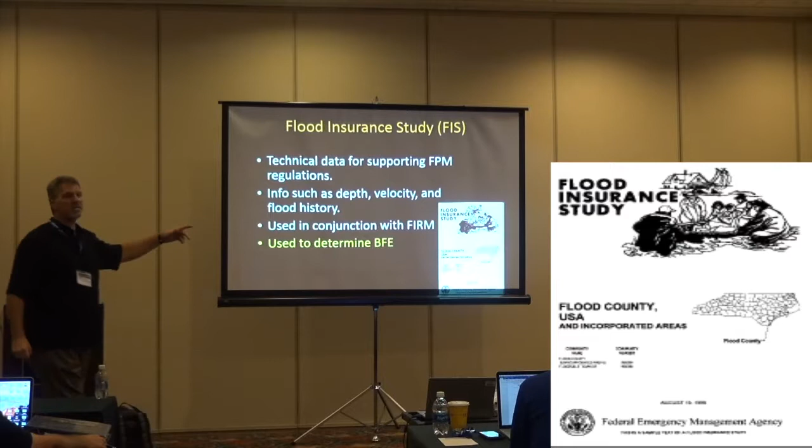No single document, no single paperwork is to stand alone. It's like you never say, hey, I got all my information from this, or I got all my information from this. We use those in conjunction. And we use that to determine the BFE. Included in our flood insurance study is the range of Manning's n values used for the channel and overbank areas.

Don't worry, we're not going to make engineers out of you, unless, is anybody already an engineer? Anybody a PE? Oh, well, there you go. So we don't have to make, you can try to make engineers out of me. I am not an engineer.

But it goes to the aspect of Manning's n where we're talking about the resistance. Now, rest assured, you're not going to have to calculate any resistance. You're not gonna have to calculate any of that in the channel flow. What you do need to know is recognize how that value is used for determining aspects such as the velocity.

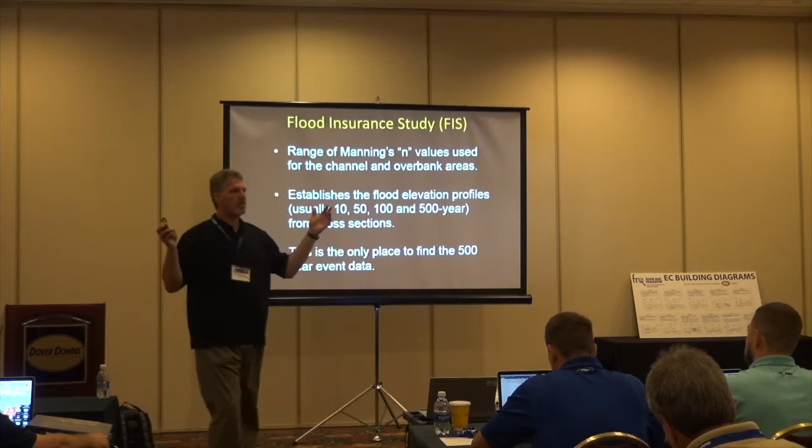Yeah, Manning's n basically defines the resistance in a channel, whether it's concrete, tall grass, rocky bottom, mud, and we'll see a graphic of it. As I said, you don't need to worry about calculating, you don't need to know what the actual numbers mean, just know that that's what results in how we determine how fast the water is going to move through a channel.

A flood insurance study establishes the flood elevation profiles, usually 10, 50, 100, 500 year. And this is the only place to find the 500-year event data. You know, we talked about those shaded, unshaded areas on the FIRM. Well, the only place to find the real data for those 500-year areas is in the FIS. Anybody need a little bit more time for this slide?

Manning's n is the resistance in the channel. That's the engineering calculation that is used, and the resistance being by what's on the stream bottom. Whether it's tall grass, short grass, concrete, rocks, mud, gravel, you name it. Every item has a resistance value to it; it all impedes the water flow. Some of it impedes the water flow greater than others. If I have tall grass, it's going to slow down the water more than smooth concrete will.

A very important term we need to understand is the floodway. The regulatory floodway is the channel of a river or other watercourse and the adjacent land areas that must be reserved in order to discharge the base flood without increasing the water surface elevation more than a designated height. Right now you're saying, wow, that's a lot to remember, it's kind of confusing. Guess what, I'm going to show you a graphic that makes it a lot easier.

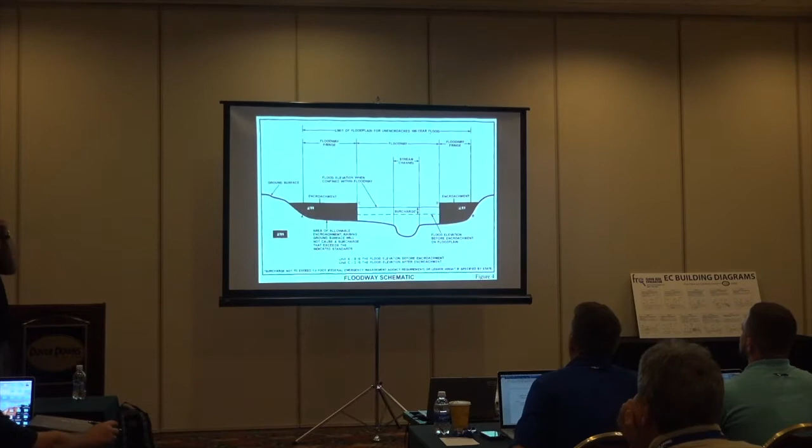So here's the graphic. I'm a picture person. I like seeing graphics and things. This is the easy way to understand it. So this is my floodway. Now visualize, this is my river or stream flowing in this direction. It's a cross section. It's a profile, cross view.

Here's my stream channel, here's my water level, here's the one bank, here's the other bank. So my floodway is the area where my water always is, essentially, and that's defined by here. So here's the area where my water always is, and that's my floodway. The areas on either side of the floodway we call the flood fringe, or the floodway fringe. They're the fringes on either side of that main channel.

Now, what do you notice about these two fringes? They have different heights, and they're also not symmetrical. They do not need to be symmetrical. A lot of people always confuse it. They're like, but they're not even on the same side. They won't be.

Does anybody go canoeing? If you've ever gone canoeing down meandering rivers, you have the slip-off slope and the cut-off slope and some of these huge built-up sandbars and some of the deep part. Almost every river is like that. Most rivers are not symmetrical, so don't let it confuse you when you see an uneven area. It still counts the fringe and the floodway and the fringe on each side. Altogether, that is my 100-year floodplain.

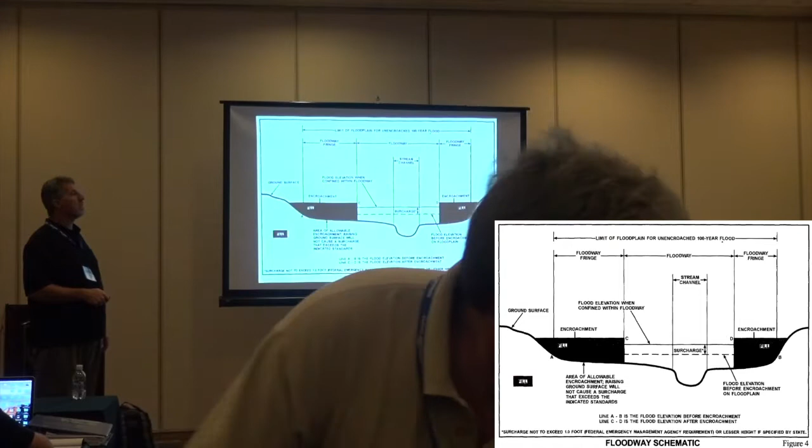Well, and they have to define that. And that brings up a good point, one of the things to remember about this is it's not limited by scale. So this here, say it's the Mississippi River, that could be a mile wide, then each one of these fringes could be another mile or two wide. Don't always depict that small little river running behind grandma's house. This fringe, this floodplain, could be miles across.

So here's our fringe, here's our floodway, here's our fringe. Now, can I build something in the floodway? Am I allowed to build in the floodway? True or false? How many say true? How many say false? Those of you that said false, you should have said true. You can indeed build in the floodway. There's nothing from the NFIP that says you can't. But guess what? We really discourage it. We don't want people building in the floodway. They can, but we really try to discourage that.

If they do want to construct something in the floodway, what do we require of them to submit? You ever heard the term no rise? Now there's no specific certificate. FEMA does not have a no rise certificate. The no rise is an engineering study performed by an engineer that determines anything that's built in this area is not going to cause the water to rise. So they named it a no rise. What a novel concept.

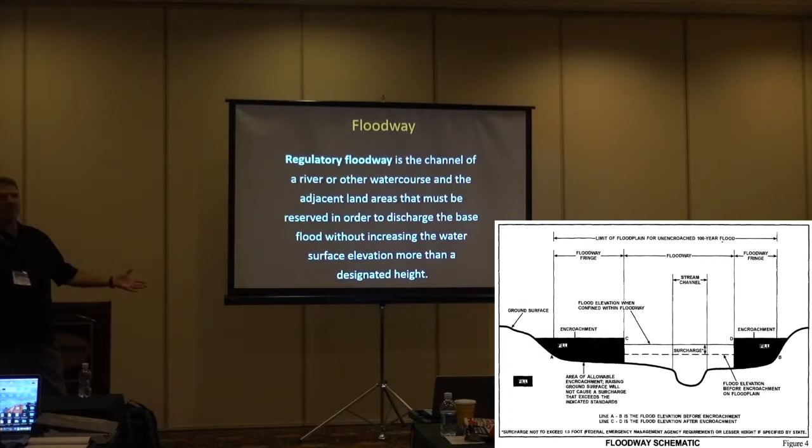What by the NFIP is the maximum rise of surcharge allowed? 1 foot. And we're going to turn all this back into a map reading skill pretty soon when we see the floodway on a map. The important thing to remember is we've taken this definition, kind of arduous, kind of cumbersome, and turned it into this picture. A little bit easier to remember.

Okay, so I can also build in the encroachment area as long as I'm not increasing the floodway more than 1 foot, or per county regulation, whatever. Correct. Be clear on that though, the 1 foot is a FEMA regulation. All right, but if I build in the floodway, say I want to go beyond the encroachment, build in that floodway, I can't have any rise. Correct.

No rise if I build in that. It has to be federally. But you're still, let's see right here, the surcharge is not to exceed 1 foot or lesser. So I can say it's 6 inches if I want to in my state. That's why you supply the no rise. If you build something there, the water's going to rise. It has to. The water, you're displacing something.

Right, so why the no rise? Why not say rise no more than 1 foot? Well, rise doesn't really. Well, they call it a no rise because the idea is you're delineating how much the surcharge is going to be raised. It's confusing because again, you can encroach as long as you don't increase.

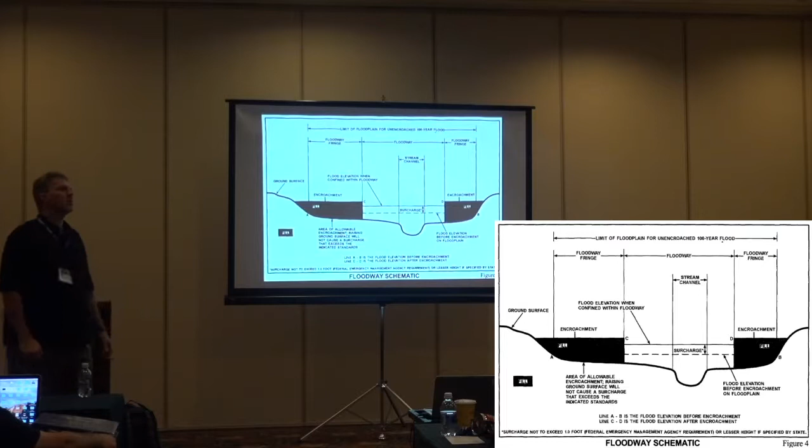But when they talk about building in the floodway, there's a no rise that's meant zero to me. But it's really no more than 1 regardless of whether I'm building in the floodway or I'm building in a road. Correct. Because the idea is you're trying to show that whatever you're constructing is not going to raise it more than 1 foot. Now you notice here that the 1 foot is the FEMA requirement. Your state could have less.

It may have to be an elevated structure. I may have pilings or piers, and that's the only element that's in there, and then maybe an engineer can calculate and say, okay, that won't cause the water to rise. But otherwise, if I stick a slab on grade structure right here, as the water hits it, it's displacing some water. Whether it's inches or feet is dependent on the size of the structure.

What's the other thing when we talk about some structures? Anybody know the other calculation that we work on? Starts with a B. We want to make sure the building doesn't float. We do buoyancy calculations. And those are important when we talk about flood-proofing a structure. And we'll mention that in a little bit. If I'm going to flood-proof a structure to make sure water doesn't come in, I also have to make sure it's not going to float away. So as I said, this becomes a little bit easier to see in a graphic format.

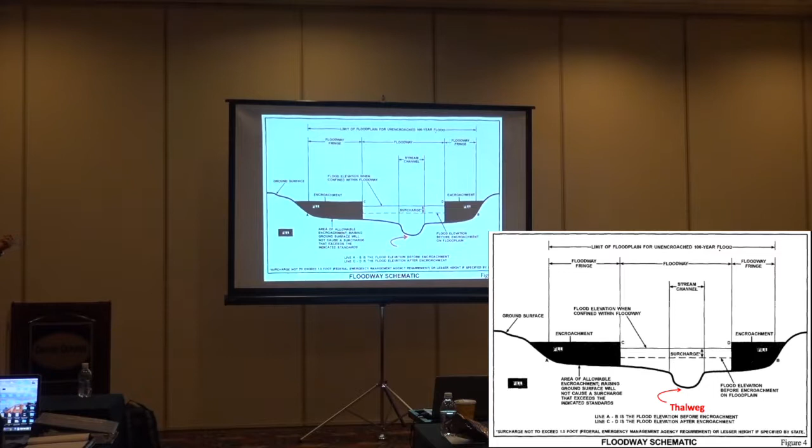So, next quiz question of the day. Does anybody know what the bottom of the stream channel is called? Close. Twilight or something like that. Close. It's the thalweg.

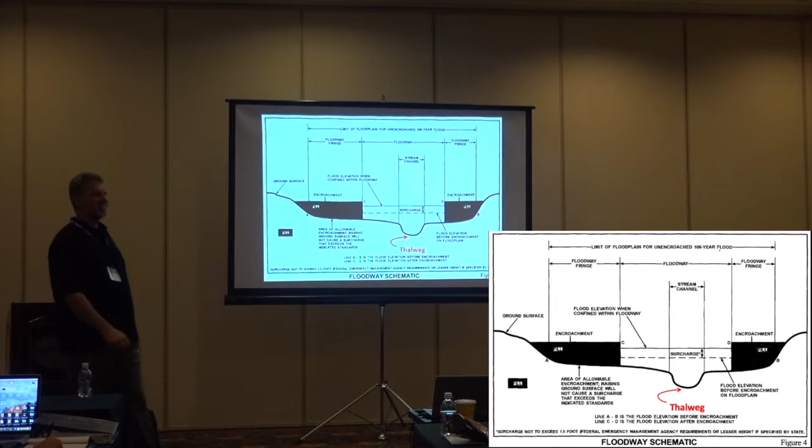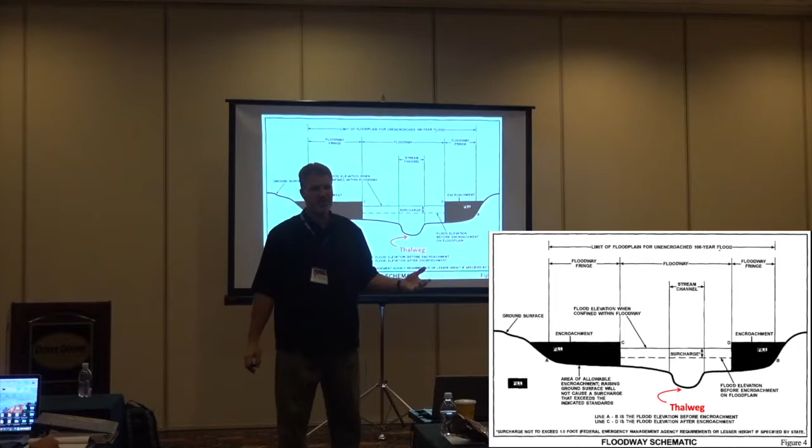So it's the lowest point at the bottom of the stream channel. So the floodway data table, and we're going to see how these correspond to our map reading, which we've already touched upon. The floodway data table provides information for each cross-section. Things like the distance, which is the stationing, the cross-section width, the cross-section area, the mean velocity of floodway flow in FPS, which is what? Feet per second, at the cross-section, and the BFE at the cross-section, and the increase at the identified cross-section. So those are all the important things that we're going to see in the floodway data table.

What document is the floodway data table in? Flood insurance study, yeah. What's that? You gave me a dirty look. I studied. We use those in conjunction. The map and the flood insurance study are your friend because you've got to use them in conjunction to answer a lot of, not just the test questions, but our general knowledge, general information of floodplain management comes from both.

If you're ever in a municipal office seeing the floodplain manager or something and all they get out is the map and they don't get out the study, I would challenge what their actual data is going to be, because the study gives us all this information that the map doesn't necessarily tell us.

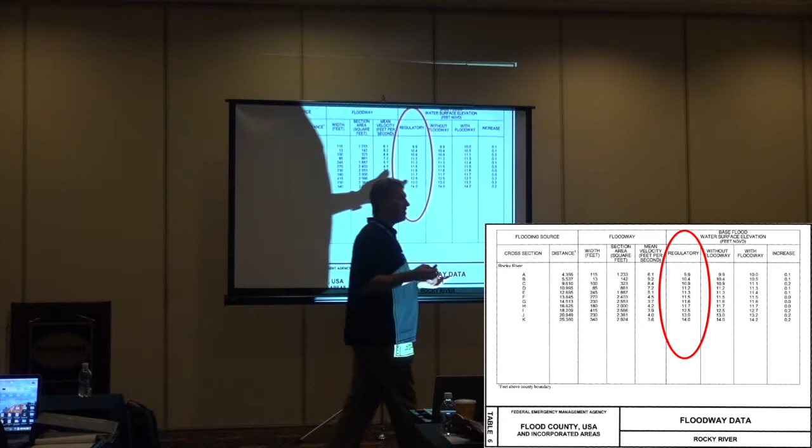So here's our floodway data table. Hydraulic analysis represented each cross-section. I'll bring a larger picture up for you. Now the important thing to remember when we're using these, it's kind of blocked out by the bottom of the screen here, but make sure you're using the proper data table for the actual water body or river that you're using. See how this one says Rocky River? For every study performed for a given area on a given FIRM, there's an individual data table for that specific floodway. So don't just assume that the first one you get to covers all the rivers on that map. There's more than one. In this case, it's Rocky River.

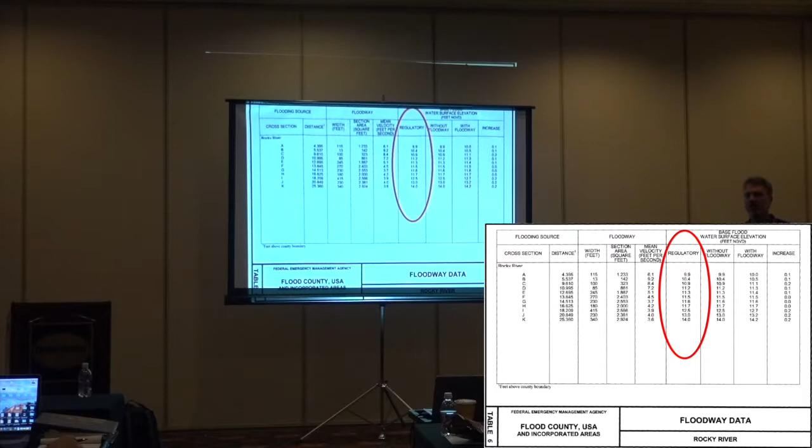And we have this highlighted because this is the regulatory. So if somebody asks you for the regulatory BFE, what do you think that number is if I look at the FIRM? 10. Because it's rounded up, so it's 10 on the FIRM. But if somebody says, I want the accurate regulatory number, I want to give them 9.9. And that would be the flood insurance study, same number. Correct. Yeah, because that's where this comes out of, the flood insurance study. And we'll see how these tie into this cross-section on the map.

If I read the map, that's going to tell me 10. It's correct, it's just a rounded number. But if somebody says, well, I want the regulatory number because I'm really cheap, I don't want to spend any more money on elevating the structure than I have to, what's the minimal I can build at? 9.9. So what are the with and without floodway numbers? Oh, we'll cover those.

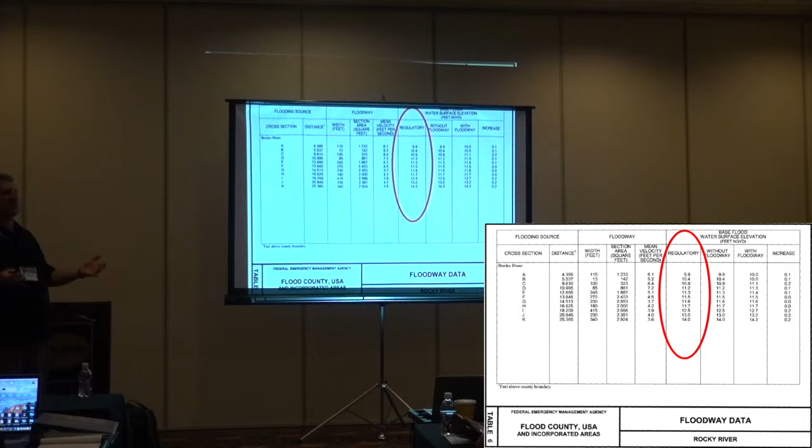So if I look in here, is this cross-section in the floodway? If it's without a floodway, it's typically the same. It's not always the same. It's typically the same as our regulatory BFE. If I'm in the floodway, they've rounded them up here, but notice some are the same. And then this goes to what our elevation increase is for that amount. And then we'll look and see in a minute where these relate to every specific cross-section.

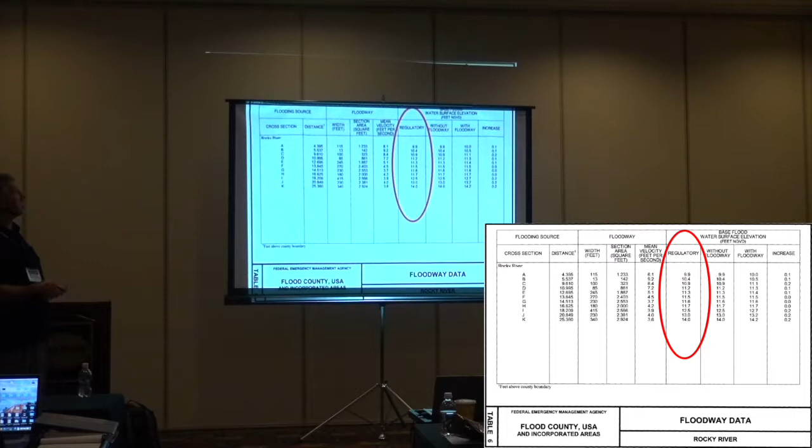So when we talk about this analysis, we've heard the term cross-section before. It's important to remember cross-sections cover riverine areas, rivers and inland. Transects are for coastal. So this whole time we're talking about riverine, we're talking about cross-section. I've got something that's delineating a river, a stream, some kind of water body that's inland. If I'm talking about on the coast, it's a transect.

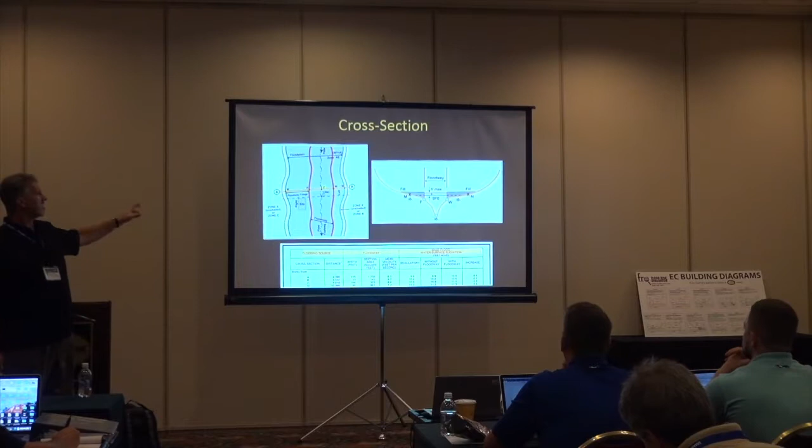So here's our cross-section. We're going to look at these in detail, so don't feel that this is the only slide. But here's our same basic delineation we just saw, the floodway. Here's our fringes. You'll see these lines drawn on here, and I'll explain what those are. So here's our floodway. Here's our fringe area. What is that whole area called if I go from one fringe, including the floodway, and the other fringe? 100 years. That's my 100-year floodplain. That's my whole floodplain area.

We see our 1 foot max surcharge. So this is the profile of it. So guess what? This is this on the FIRM. And this is this in the floodway data table. So when we look at all these different graphic representations, if I look at each one of these on one piece of paper and I'm not relating it to the other two, it's kind of way out there. Like, where is this coming from? What is this used for? But all these are the same thing in just 3 different methods. Your floodway is between the 2 solid red lines, right? Correct.

And on this map, here's my 2 solid red lines. Well, obviously they're not straight because the river's not straight. But we have our cross-hatching delineation from the floodway, and we'll see that again. And how did we know that was the cross-hatching delineation that's on the floodway? It's on the legend in the map, and we're going to look at that again. But if there was any confusion, I would just look back at the legend and go, hey, that's how that works.

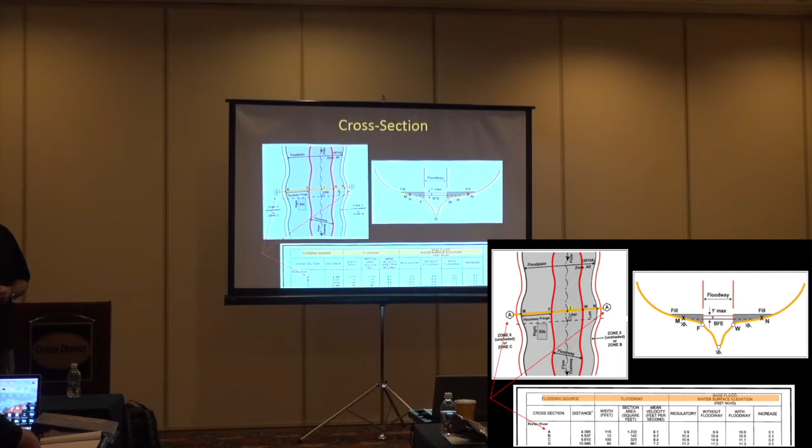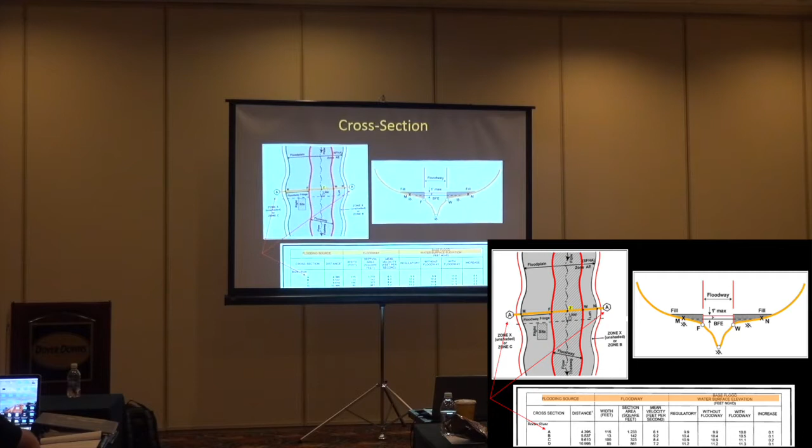So on the flood insurance study that I printed out for Flood County, USA, Jim just noticed, it does say down here, feet above county boundary. Is it feet above county boundary, or is it feet in distance from? It says feet above county boundary. Yeah, and that actually may be an error, because think about it, if your distance downstream is 4 feet, your next one's not gonna be 5 feet, it'll be right next to it. That superscript is probably supposed to say miles, whatever the increment was.